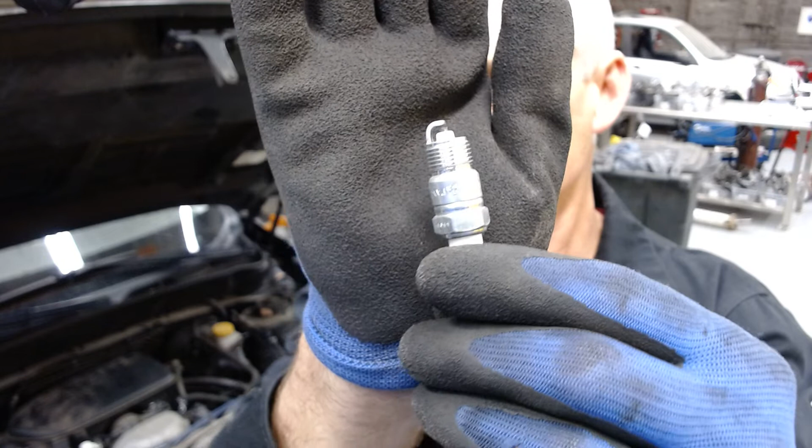The ignition system is that system that creates the spark at the spark plug to ignite the air and fuel mixture that's compressed into a very hot explosive charge by the compression of the piston. So what an ignition system does is takes the spark plug, and causes a spark to jump between this side and that little round center terminal right there in between. I'm going to illustrate this to you this morning very graphically.

It uses this device called an ignition coil. It's a step-up transformer. Transformers on the poles out in the community are step-down transformers. They take the voltage from about 4,000 volts down to 110 for your house. You say, well, how about 220? You get 220 by bringing 110 volt wires to your house and joining them with a breaker on the panel. We call those 110 volt legs.

This is two coils into one. This type of ignition system is called a DIS or waste spark system. It has one coil here and one coil here. Each one fires two cylinders. That's like the car we have here, this '09 Forester.

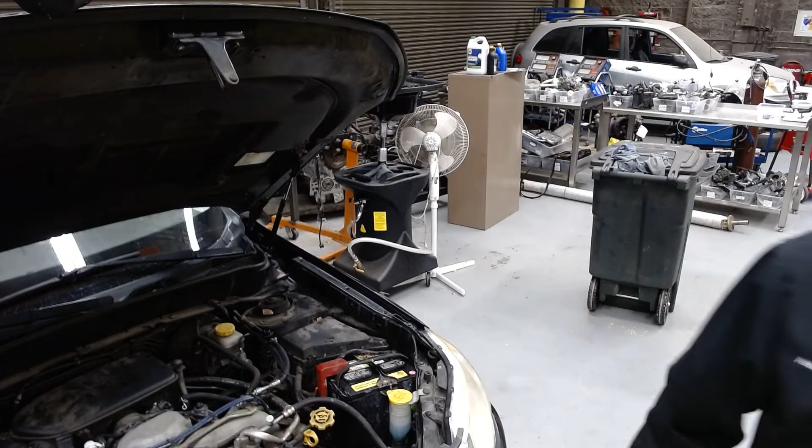So what I'm going to do is pull a spark plug wire and show you the spark. Before I do that, I want to take the camera and come over to the car. You'll notice these two blue cables here and these two blue cables here. This Subaru engine is a horizontally opposed, or pancake, engine. It's got two cylinders going towards the driver's side and two cylinders going towards the passenger side. The pistons are laying horizontal in both directions.

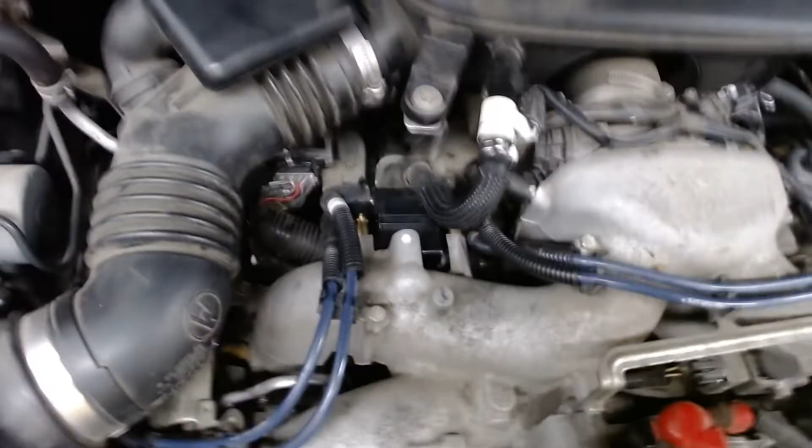So what these four wires are, these are the spark plug wires. And that guy right there, you can see it, is the ignition coil. It's a little hard to see. It's bolted sideways to the top of the intake manifold. These wires carry high voltage, low current electricity to the cylinders to ignite the air and fuel.

So what I want to do is reach down here and unplug one of these wires, which I just did. I just unplugged that wire from number 2 cylinder. I'm going to take my spark plug, set the camera down right here so you can see what I'm doing, and take this spark plug and just push it in and snap it on just like it is.

Then I'm going to take the ground wire. This jumper wire with these two alligator clips, I'm going to connect one to the negative side of the battery. This wire has a very thin insulation, so I don't want to touch it while I'm doing this, otherwise I'll get shocked. This is the one place on a car where you can get shocked, the ignition system, because it's a high voltage, low current system.

I'm going to go ahead and put the camera right here so that hopefully you'll be able to clearly see that spark. I'll put my hand in front of it so it should focus. Okay, having a little trouble getting it to focus. Sorry, a little technical audiovisual difficulties. If I put my hand behind it, you'll be able to see that spark really clear. So I'll start the car now, and I'll try to get my camera to stay put. It's not cooperating real well at the moment.

So let me grab this guy up here, get him ready, and get this guy ready too. And I'm going to go ahead and start the car. Okay, there we go.

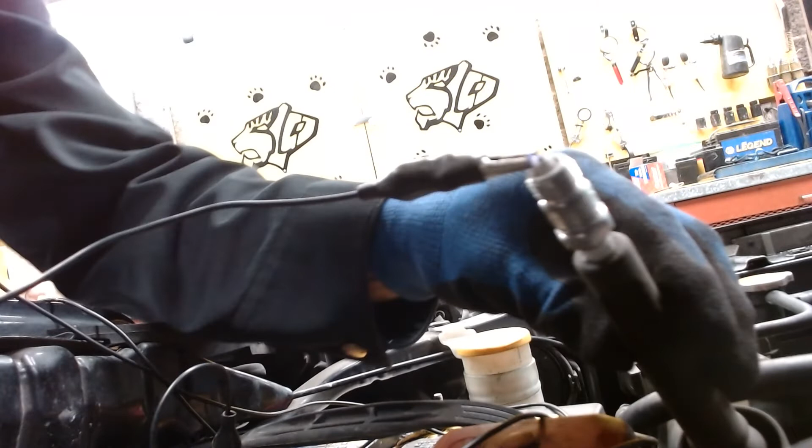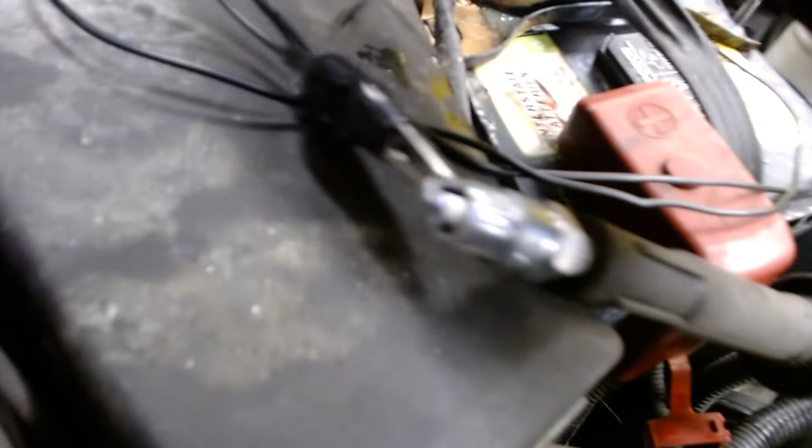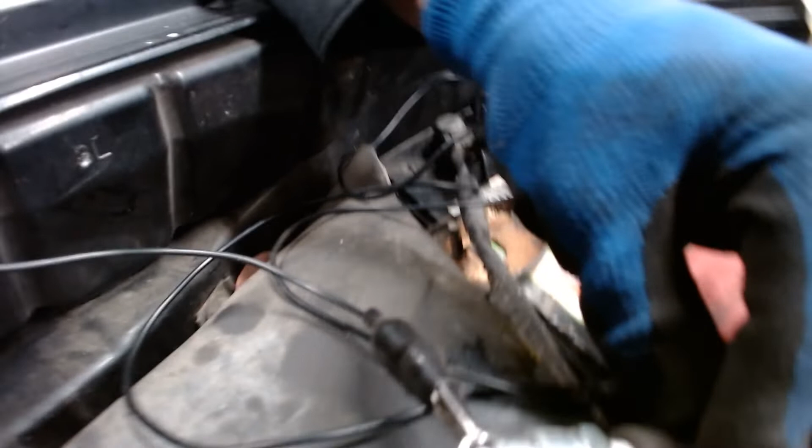Hopefully you can see here. Let me see if I can get it to focus. Come on, dude, focus. I'm struggling to get this thing to focus, but you can see the spark jumping between there. I just can't get it to focus on that, which is a bummer. Let's see if I put it flatter here, you can see that bluish purple spark.

And if I put my hand there, it finally focused. See that spark in there?

Okay, pretty cool. Shut the car off.

I apologize that it was so hard to get that thing to focus on. That spark, that little blue spark you saw, was roughly 10,000 volts, 8 to 12,000 volts. And of course the engine was misfiring because it didn't have that spark plug wire on its cylinder. Anyway, let's continue on in the classroom.

So what we're going to be doing here is talking about the ignition system, its parts and functions, and how it creates that little spark that ignites the air and fuel inside that compressed air-fuel mixture composition in the cylinder. So here we go.

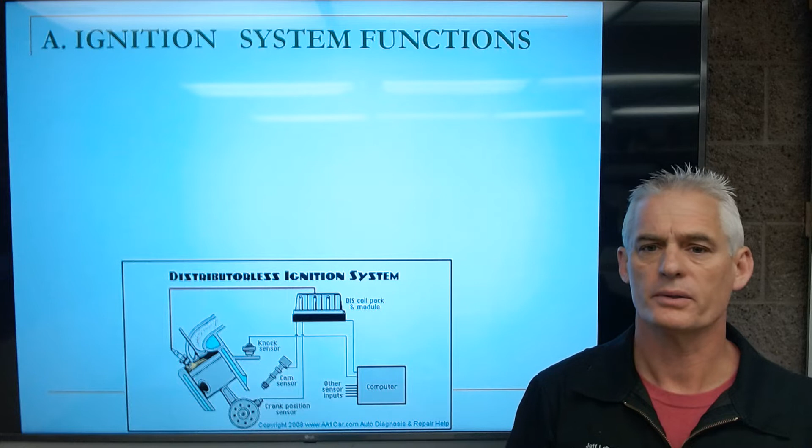So the ignition system's functions go like this. First, its first function is to turn the engine on and off. On a gas engine, we used to just turn the spark off. Now we turn the spark off, depower the computers, and turn the fuel pump off all at the same time. But primarily it was to turn on and off the engine by turning off the ignition system.

Its second function is to produce a high voltage spark at the spark plug to ignite the A/F mixture. A/F mixture is my abbreviation for air-fuel mixture. At sea level, the ideal air-fuel mixture, using a chemistry technical term to describe the ideal chemical composition, is the stoichiometric air-fuel ratio.

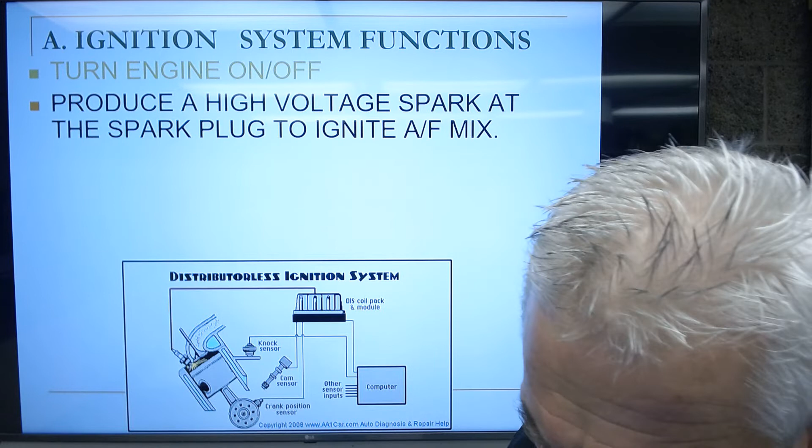That's the chemically correct, or ideal, air-fuel ratio. At sea level, it's 14.7 parts of air to 1 part of fuel by weight, not by volume, but by weight. So a tremendous amount of air is used to burn 1 part of gasoline. If we say 1 gallon of gasoline, a lot of air is used to burn that 1 gallon of fuel. Okay, so we've got to produce a high voltage spark to ignite that air-fuel mixture.

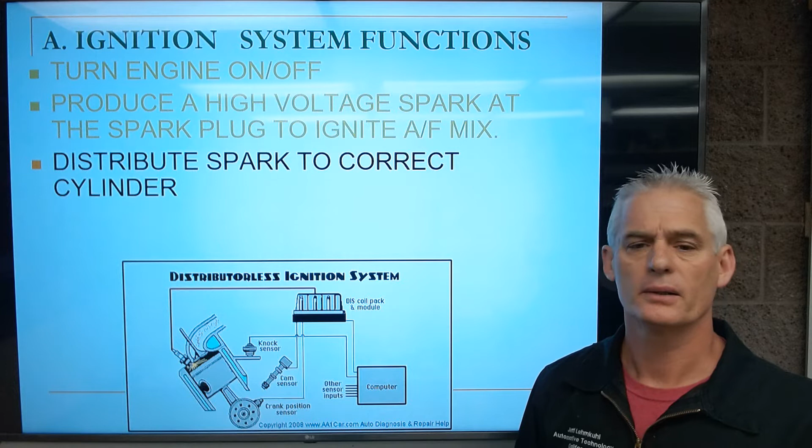Third, we want to distribute the spark to the correct cylinder, and at the correct time. We want the spark to go to the right cylinder, because in the 4-stroke cycle, if my hand is a piston, I go down on intake, up on compression, down on power, and up on exhaust.

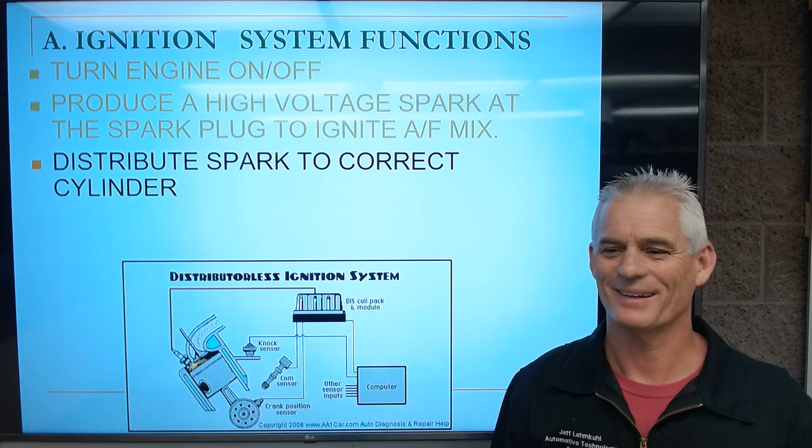Where is it that I want that spark to occur? I don't want it to occur on intake or on compression, but I want it to occur at the end of the compression stroke and the beginning of the power stroke, and I want it to occur in the correct cylinder. In other words, in the cylinder that's at the end of its compression stroke, that's the one that needs to get the spark.

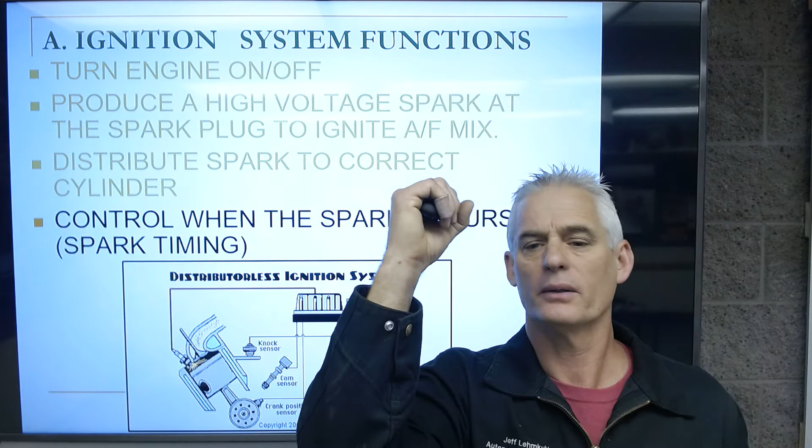And then, timing controls when the spark occurs. So does it occur in this cylinder right at the end of the compression stroke, or in reality, do we start a little bit before the piston's all the way at the top? We say before top dead center, usually 6 to 12 degrees before top dead center at idle, somewhere in there.

And then at freeway speeds, when we're going maybe 3,000 revolutions per minute at roughly 75 miles an hour, the spark may be occurring at, say, 50 degrees before top dead center, because everything's happening so fast, we need to make the spark occur earlier so it has time to ignite the air and fuel, so when the piston is ready to go down on power, the explosion's ready to push the piston down on power.

So what you've got in this picture is a picture of an ignition system. There's a piston connected to the crankshaft, there's a valve, there's a spark plug showing a little explosion, and here is a coil pack, similar to the one I just showed you. This is one type of ignition system. There are 4 or 5 different types, roughly. This one uses a computer and some sensors so the computer can decide when to make that spark occur into the spark plug to ignite the air and fuel.

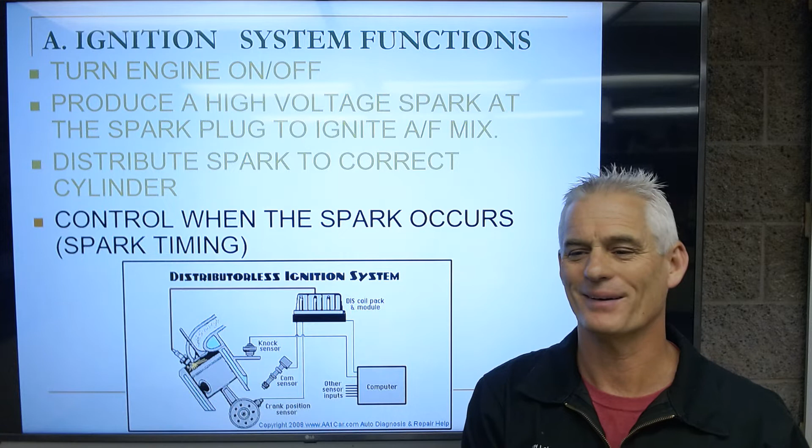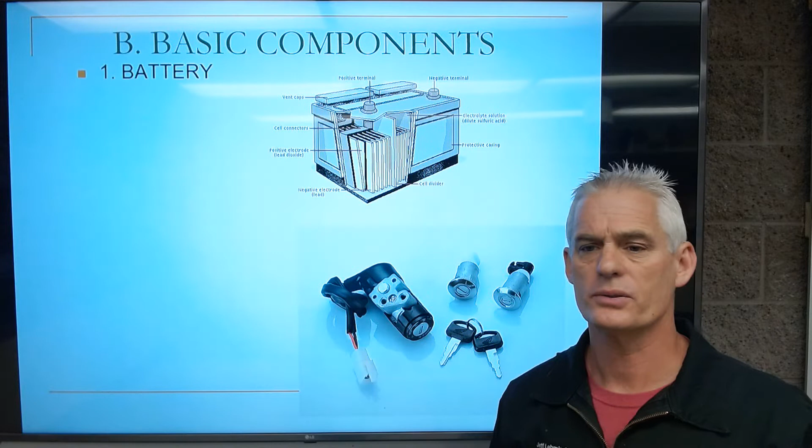So here we go. Next, the components of an ignition system go like this. The first is the battery. The battery is involved in initially sending power into that ignition coil to make a spark, so just like the starting system and charging system, the battery is initiating everything. Once the car starts, the battery isn't powering things up anymore, as you learned in the charging system, but it's the alternator. So here's a picture, a cutaway of a battery.

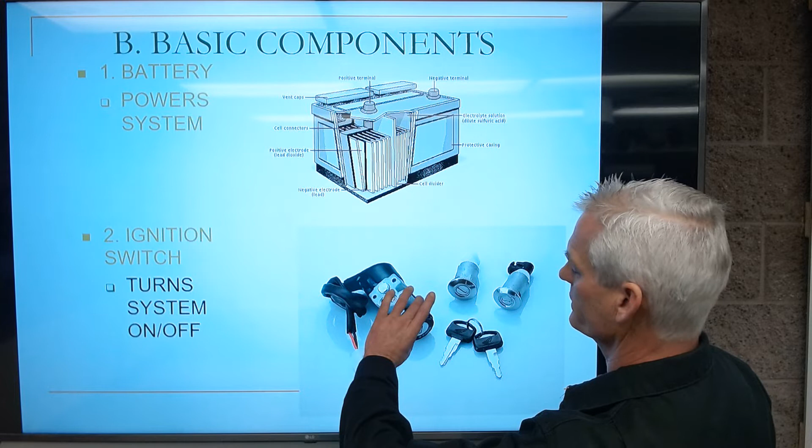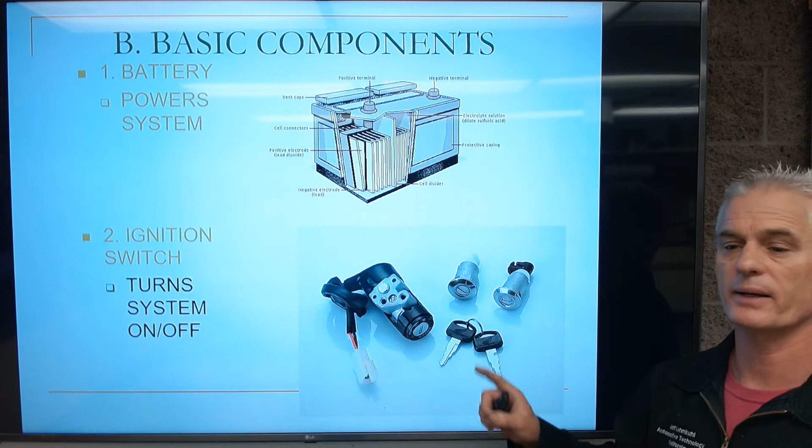Second component is the ignition switch that's used to turn the system on and off. Here's a set of keys and a couple of lock cylinders. This is an ignition lock cylinder, and these are door lock cylinders. Most all keys today have a chip inside them that talks to a little transceiver around the cylinder, saying, I don't want you to crank this car and start it unless I've got the right key. So that's a theft deterrent and prevents cars from being stolen so easily.

The ignition switch is used to turn on and off the system. Whether it's a push button or a key type, it's still turning the ignition system on and off, amongst other things. Third is the ignition coil, and here's where you need to spend a little bit of time.

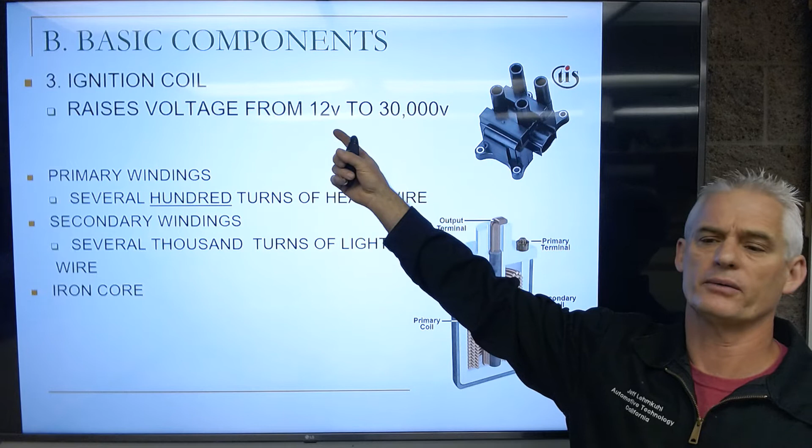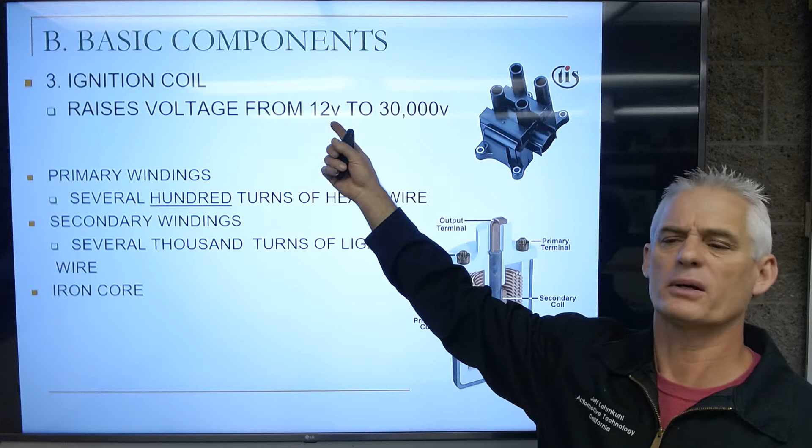The ignition coil is a device that steps up the voltage, so it is a step-up transformer. It's making voltage go from roughly 12 volts, 12.6 of a fully charged resting battery. During cranking, the battery voltage drops to about 10 to 11.5 volts because we're pushing current through the starter motor. Once it starts and the alternator starts running, this is going to be closer to 14, maybe 14.2, 14.3 volts, depending on the car.

The ignition coil is going to boost that roughly 14 volts when we're running up to roughly 30,000 volts. At idle, most cars idle about 10,000 volts, but when they're going down the road, they can be at 20, 30, 40, 50,000 volts. I've seen Ford systems that'll make 100,000 volts.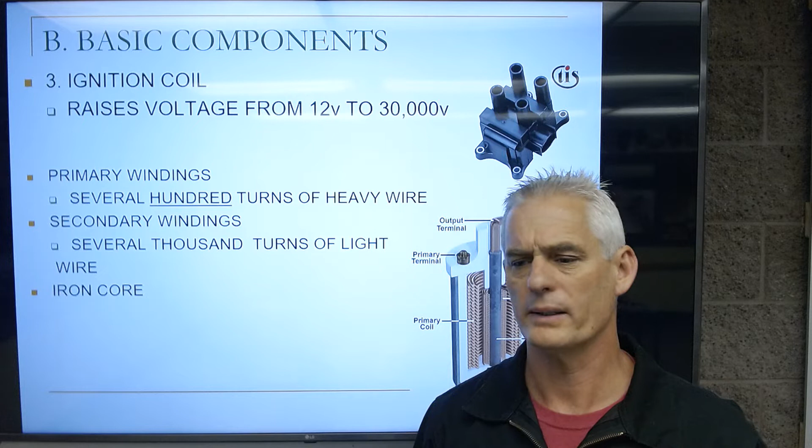Very, very high voltage, but it can't hurt you. It does shock you—it's like a very strong static shock, but it doesn't electrocute you. I define, and this is my own definition, electrocution as current flowing through you where you can't let go and you're constantly being shocked, whereas this will just give you a zap and that's it. Can it hurt you? Can it kill you? No, not possible—it's way too low of current. It has high voltage, but it's just like a very strong static shock.

If you guys were here, as I usually do, I take the whole class—we all hold hands, one person touches the spark, the other touches the battery ground or the engine block, and we all get shocked at the same time. It's really cool, you'll like it.

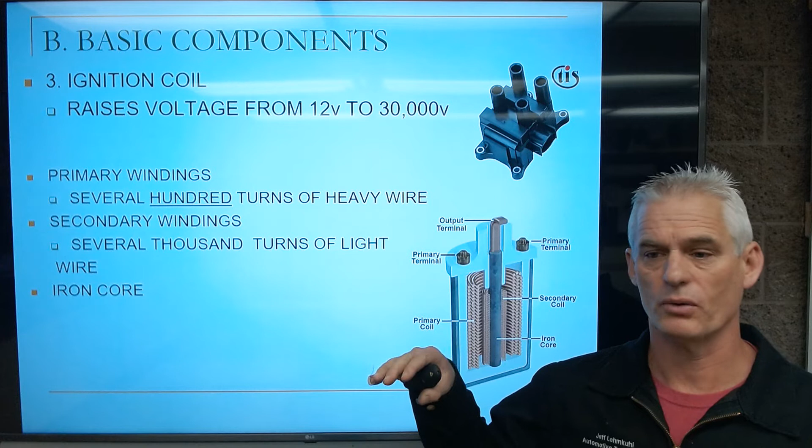So let's talk about how a coil is constructed. It's a step-up transformer, boosting voltage from very low to very high. The transformers on your poles are stepping the voltage down for your house—we take roughly 4,000 volts going down the street for PG&E and bump it down to 110 volts.

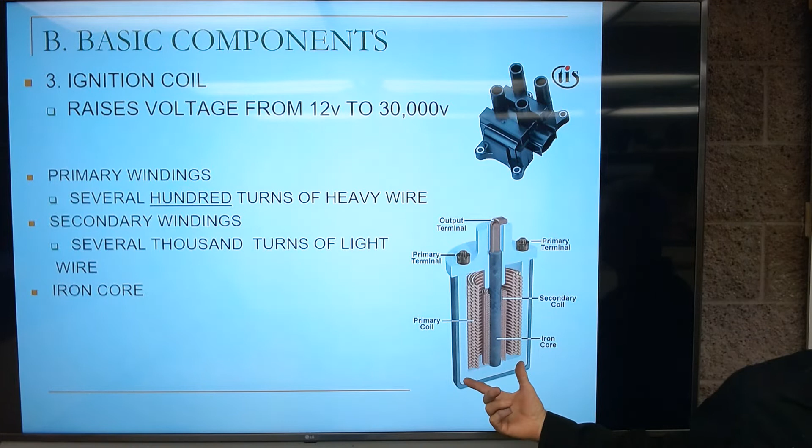So ignition coils—here's one style, this is a DIS coil. This is an old school can coil, and I've got one of those here too. Here's the difference between these: here's an old school can coil, and it looks an awful lot like the transformer up on a telephone pole.

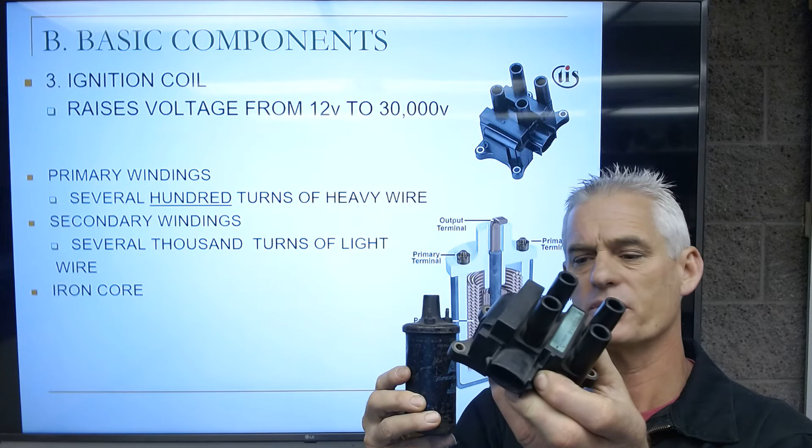Here's a DIS coil, which is actually two coils in one. And then here's a modern car—this is a Honda coil-on-plug coil, an individual coil that snaps right onto one spark plug. So it goes just like this—you take this coil and push it onto the spark plug, and that's how it sits in the engine.

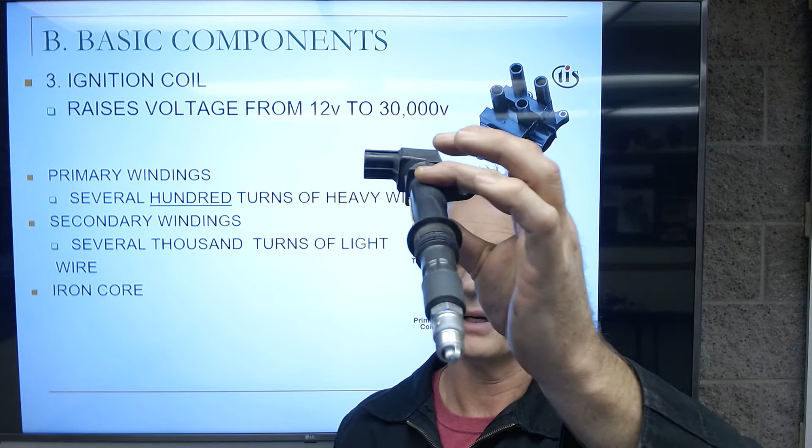This one has no spark plug wire, like the long blue cables you saw out there on the Forester. It does have some 16 gauge wires plugging in here that turn it on and off, but this guy is boosting the voltage from roughly 14 volts to anywhere from 10,000 to 30,000 volts.

So what I want to show you is what's inside this coil. We'll look at a can coil because it's easier to take apart. These are constructed with two coils of wire inside, with some segmented iron bars down the center, and it's all inside a non-conductive oil—kind of interesting, very close to what you have on the telephone pole. That non-conductive oil cools it, and these would very rarely fail back in the day.

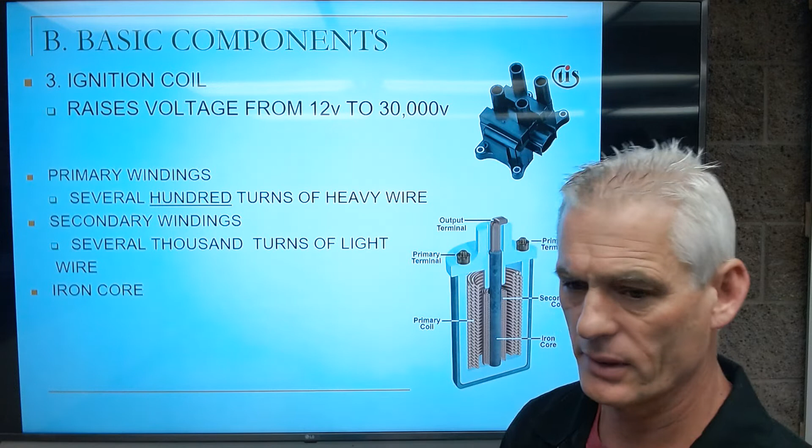When I was in high school—I graduated in 1981—pretty much every coil was like this. In the mid-'80s they started changing, and then changed significantly going into the '90s. But it shows here a primary coil, primary windings, and secondary windings or secondary coil. So inside you have two wrappings of wire.

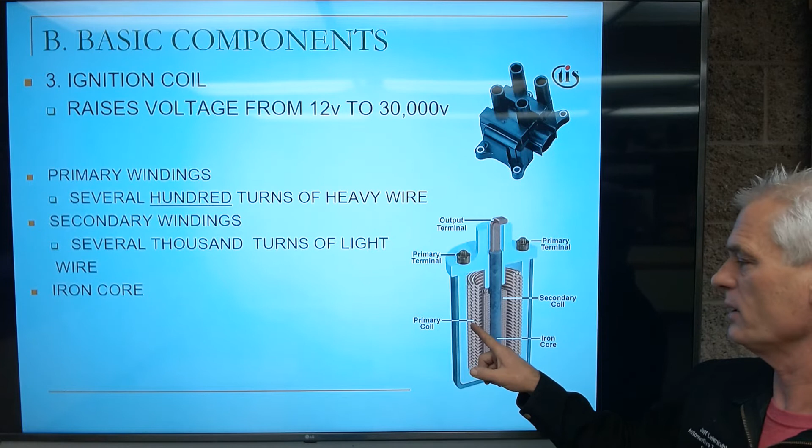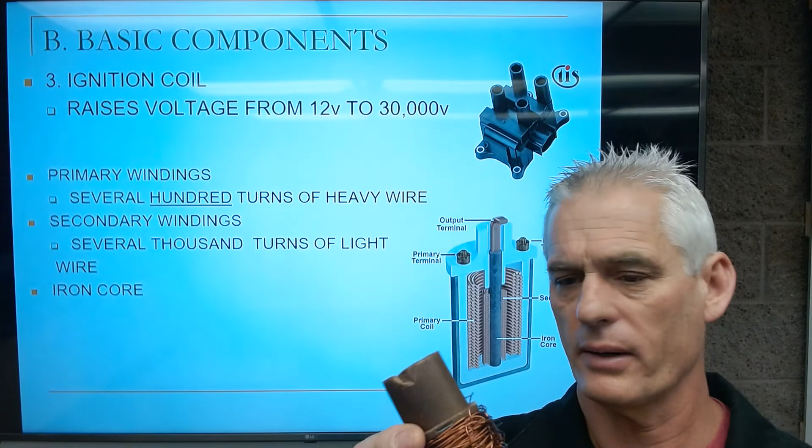The primary windings are several hundred turns of heavy wire—roughly 16 to 18 gauge. The secondary is thousands of turns of very, very fine wire. Here's the wire: here's a can coil with the primary wire, probably 18 gauge, copper, solid, and coated with plastic so these wires don't short between each other.

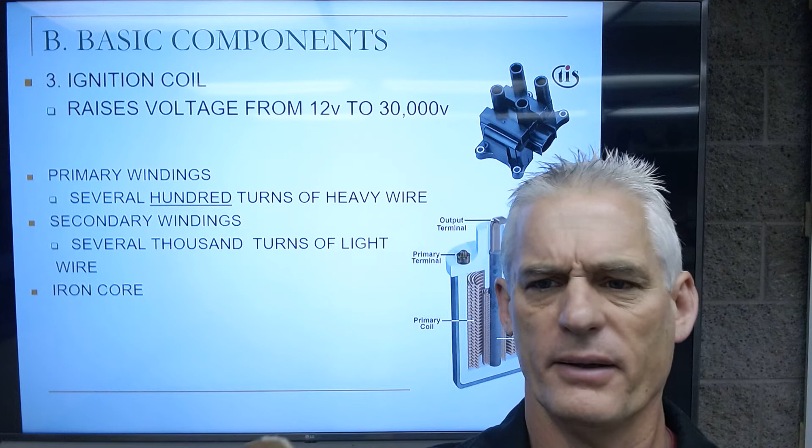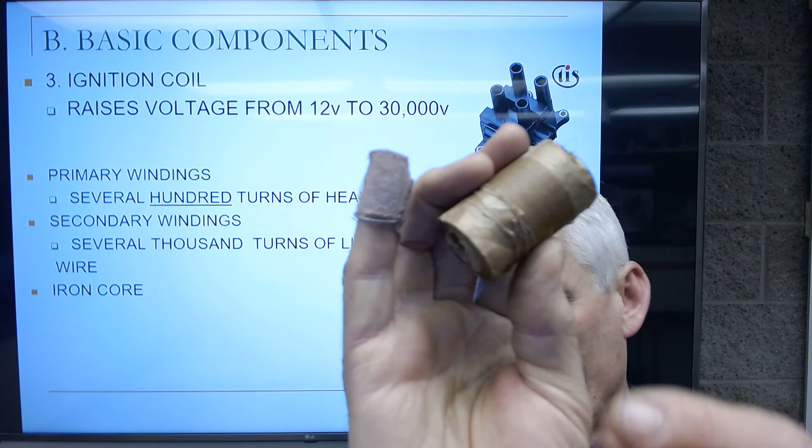And then here's the secondary, which is really hard to see. You can see the wrappings of copper there, but if I grab the end of it—let me do that—it's going to be very hard for you to see. I'm going to put it in front of my hand to see if the camera will focus on the wire, and it's hanging right here.

I've got it in my... okay, there it is. You can just barely see it. Now it's focusing on it. Little tiny fine hair-like wire, and it is like hair.

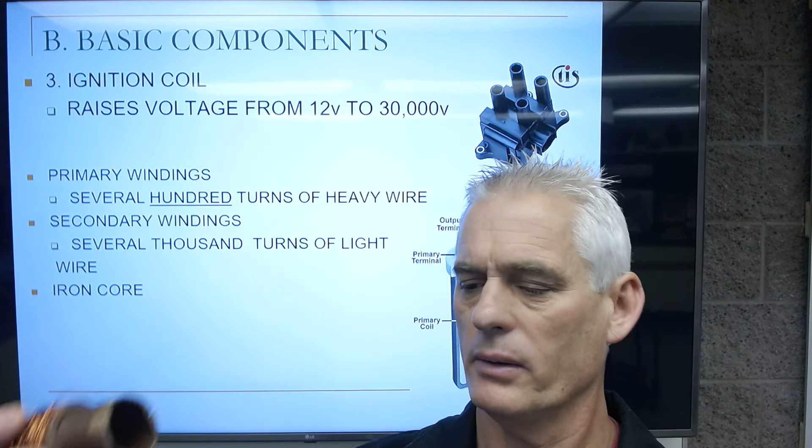It's roughly 1/1000th to 2/1000ths of an inch thick, and it's all wrapped around these layers of paper. Inside the ignition coil, here's the primary, here's the secondary. This just slides inside. The magnetism that's created goes right through this paper wrapping, which has no effect on it at all.

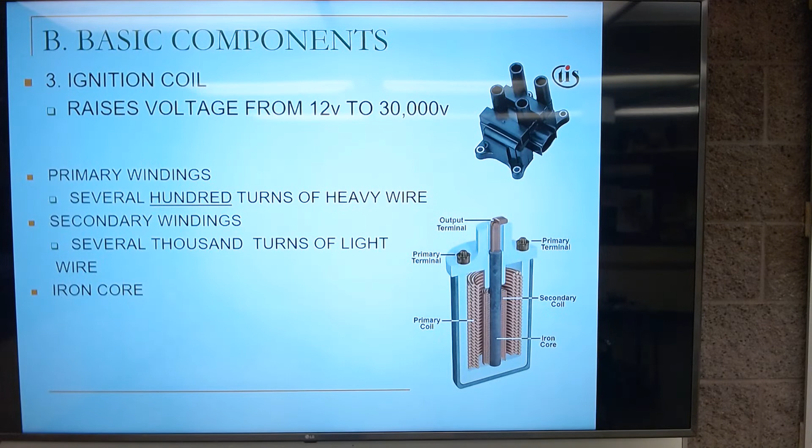Down the center of that coil are these segmented iron bars right here. So these would be... here's another one. This one's kind of pretty. There's another wrapping of secondary wire, and you can see the wire pretty clearly there. These segmented iron bars go down the center to strengthen the magnetism that's made.

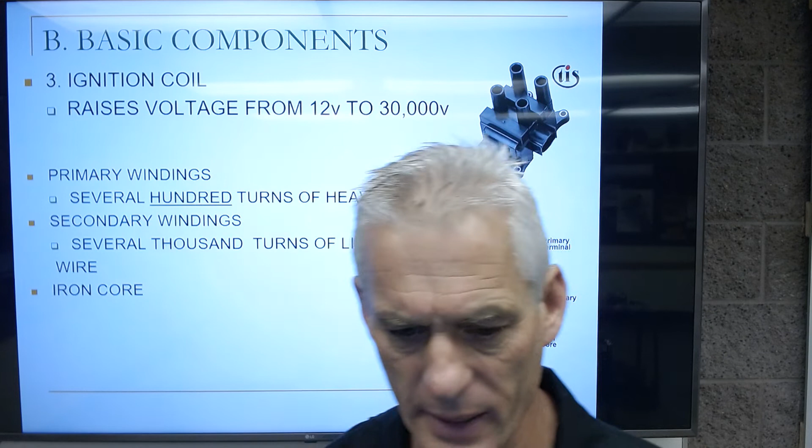That's the iron core I'm talking about, those segmented iron bars. Let's talk about how this thing works, okay? Well, we'll get to it in just a moment, sorry. That's an ignition coil. So the ignition coil has a primary winding or coil, a secondary winding or coil, these segmented iron bars, and it's a step-up transformer. So next is spark plugs.

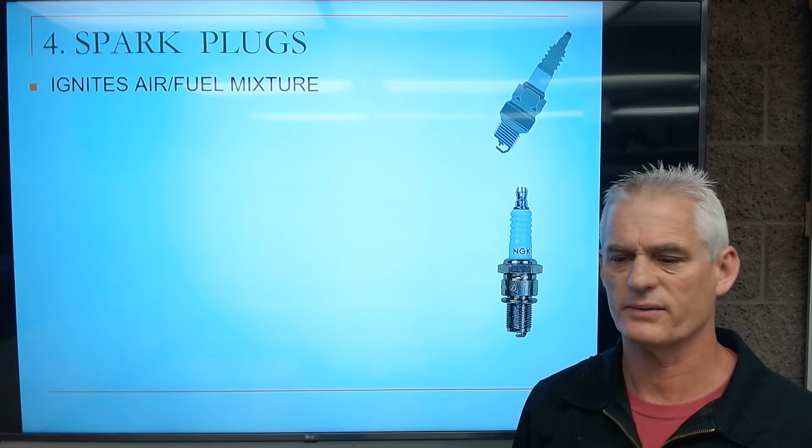The spark plugs are going to ignite the air-fuel mixture. Okay, and here's another one there. So a spark plug is going to ignite the air-fuel mixture. It just gives us a little center terminal and side terminal between which a spark can jump and ignite the air and fuel that's all compressed around it.

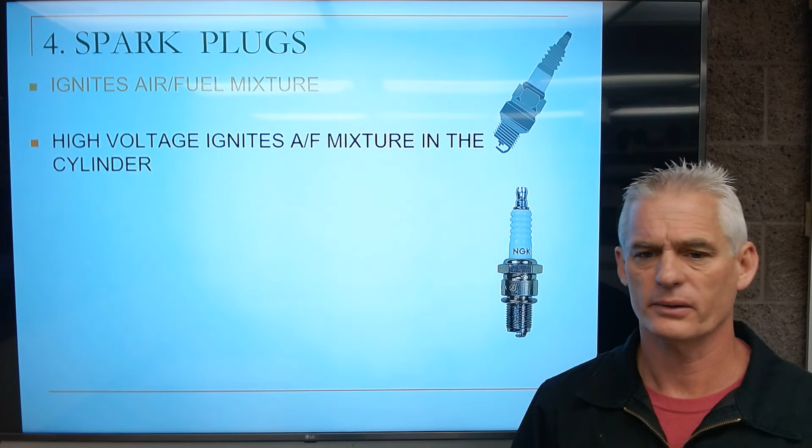High voltage ignites the air-fuel mixture in the cylinder. The center and side electrodes, center there, side here, provide a connection for the spark to jump. So the spark plug has a connection for the plug wire to snap on. It conducts spark to the cylinders.

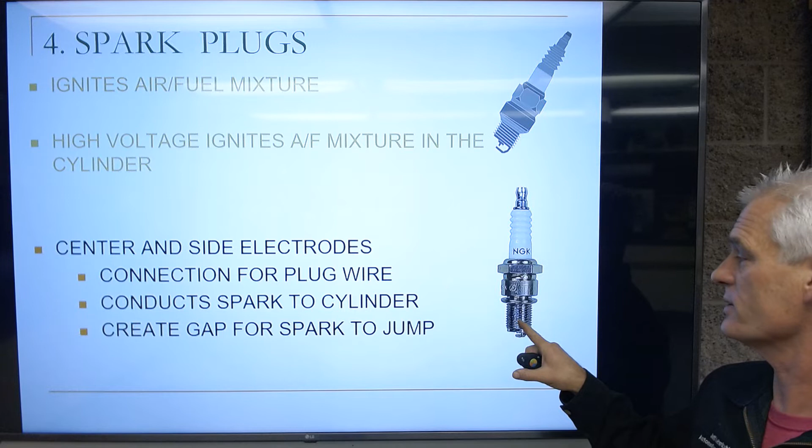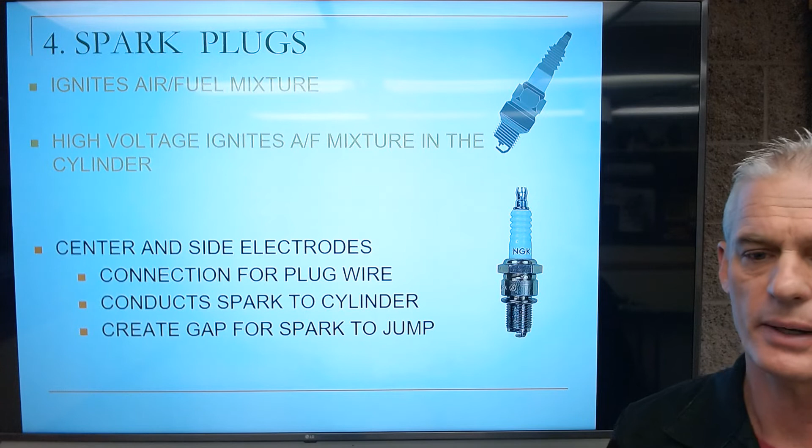It goes down through, and then it jumps between the gap there. Some spark plugs jump from the center terminal to the side, some jump from the side to the center, but that's another class. These thread into the cylinder head with this hex here, and we can get it off with a wrench. It's got a porcelain insulator, and high voltage electricity goes down through the center of this and jumps to ground. Okay, that's the spark plug.

So next, on some cars, we have what's called a distributor. Old school cars up until the mid 90s, and if it's a Honda, all the way until 2000 roughly, had what was called a distributor, a fairly large rotating mechanical device. I'm grabbing one right now, like this. You can kind of get an idea of the size. This is from an old Chevy 350, would have been out of like my old Nova or something like that.

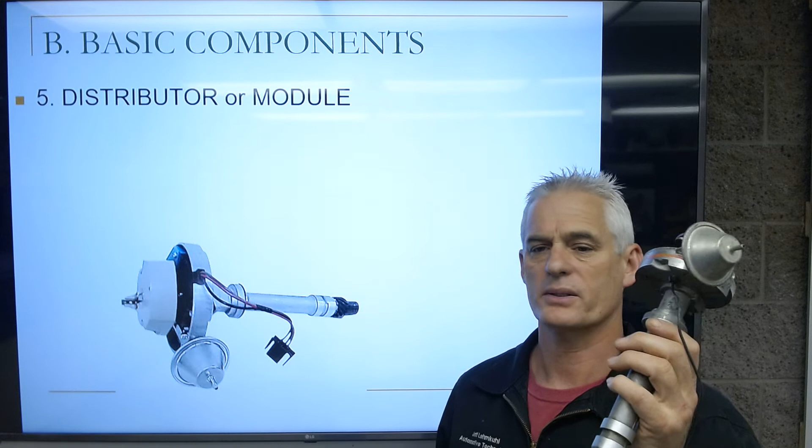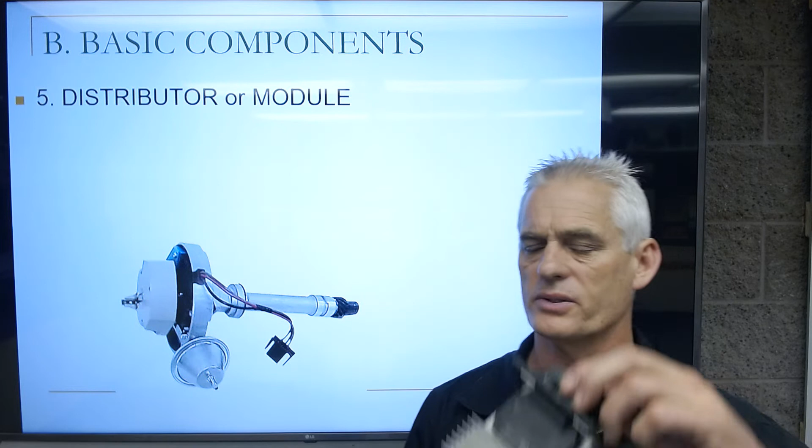Gear driven off the camshaft, it spins that guy in there, and this guy's whole job was to distribute the spark to the correct cylinder at the correct time. Modern cars don't use a distributor anymore, but they use some sort of an ignition module. An ignition module is a solid state, no moving part device that's used in conjunction with ignition coils or coil-on-plugs to fire the plugs at the correct time.

Some people who know a lot about ignition systems would say, really, you want to compare a distributor to a module? Well, early electronic ignition, computer controlled distributors had modules inside them, so they were kind of incorporated into it. But anyways, both are involved in turning on and off that ignition coil to make the spark. That's how basic we're going to keep it at this point.

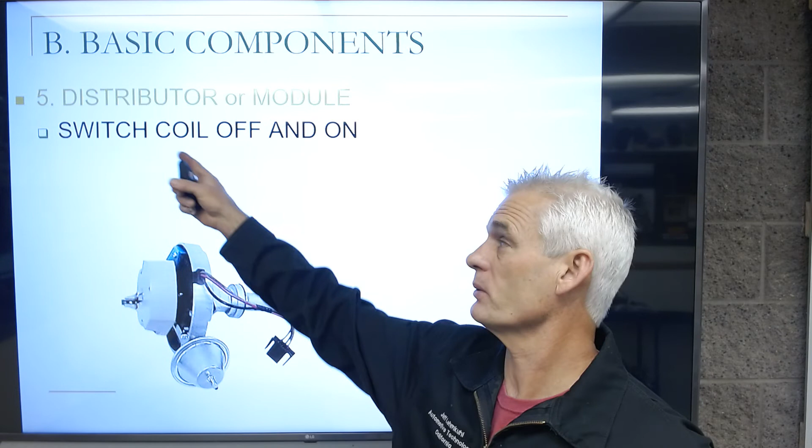So they're going to switch the distributor or the module. Both are used to switch the coil on and off, or off and on, either way you want to look at it, and then send the spark to the correct cylinder at the correct time. That's obviously very important because we want the thing to run right, and that's got to occur at the end of the compression stroke, right before the power stroke. So whichever cylinder is at the end of its compression stroke needs to get a spark.

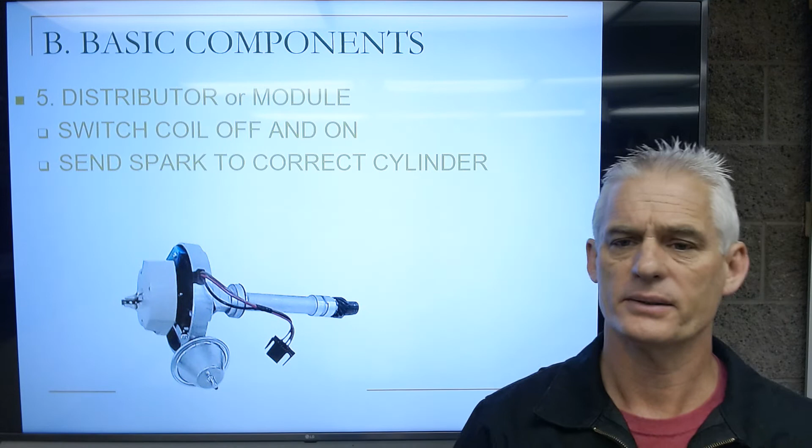Okay, so that's that. Next we have wires in the ignition system. First we have what's called primary ignition system wires. These are low voltage wires, anywhere from 9 volts to 200 volts, and they are 16 gauge wires.

Really, it should be more like 10 volts to 200 volts, because during cranking there's only about 10 volts going through them. Once the engine's running, there may be as much as 200 volts depending, but that's a bit confusing, so we'll just say it's roughly 14 volts. In any case, the secondary voltage is 10 kV to 50 kV.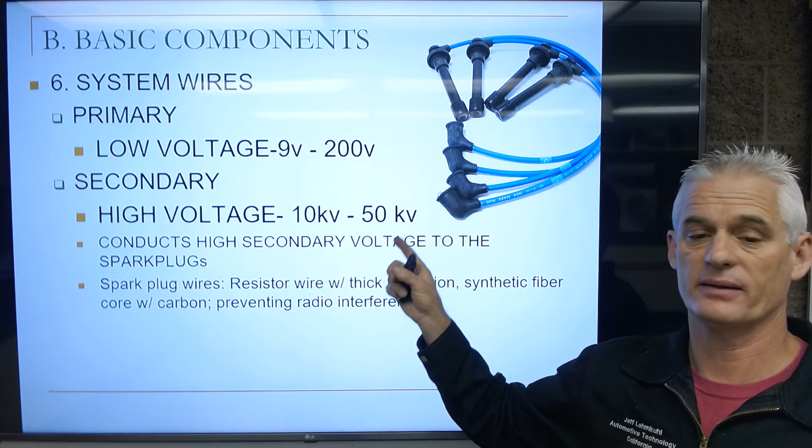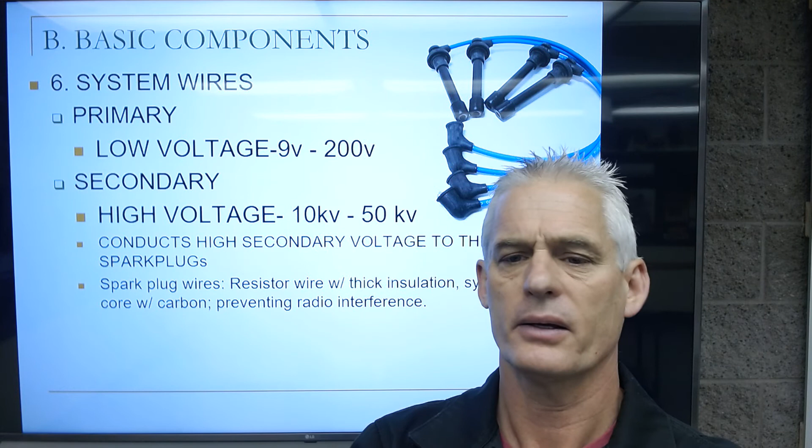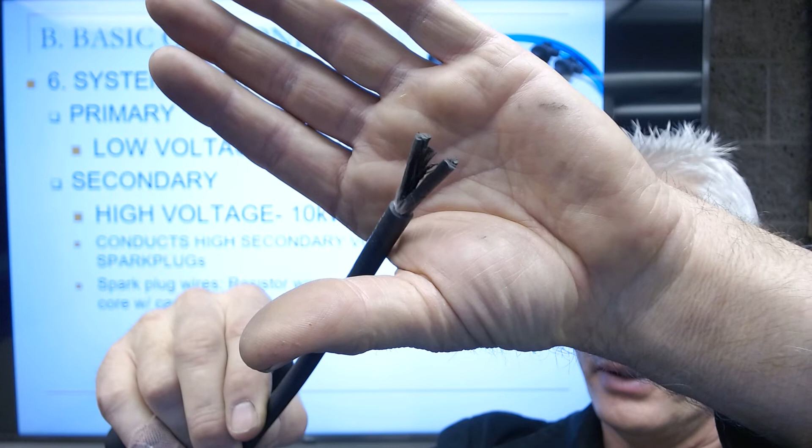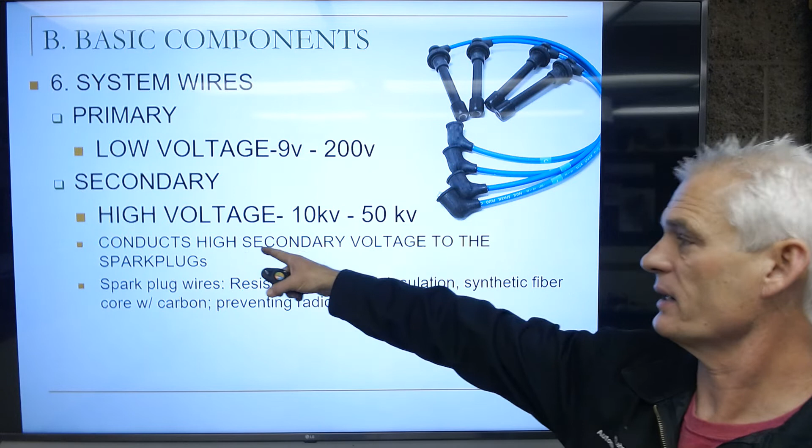These are very thick insulated wires, we call those spark plug wires. I'm grabbing one down here to show you. Here's a spark plug wire, and it's got a very thick coating. I've cut this guy open, and it's got this carbon impregnated, fiberglass-looking core, and the electricity will conduct down that. Then it's got this very thick insulation to keep the spark from jumping from the center of that wire to ground on some metal part. So the secondary is going to conduct high secondary voltage to the spark plug.

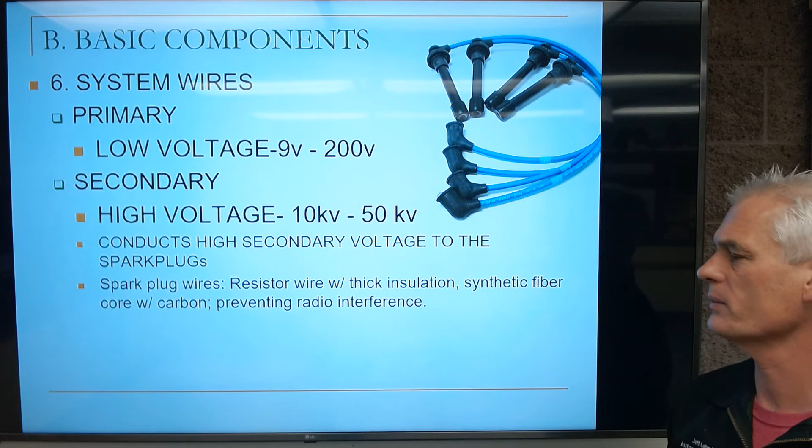Let's go back to the primary for a moment. The battery and alternator bring low voltage in through 16 gauge wires. The secondary side conducts high secondary voltage to the spark plugs. Spark plug wires are what we call resistor wire. They have thick insulation and are resistor wire, so believe it or not, we don't get a lot of magnetic field interruption of your radio reception. They have a synthetic fiber core with carbon, preventing radio interference.

Okay, here's how an ignition coil operates. The ignition coil operates by putting current through a coil, producing a magnetic field.

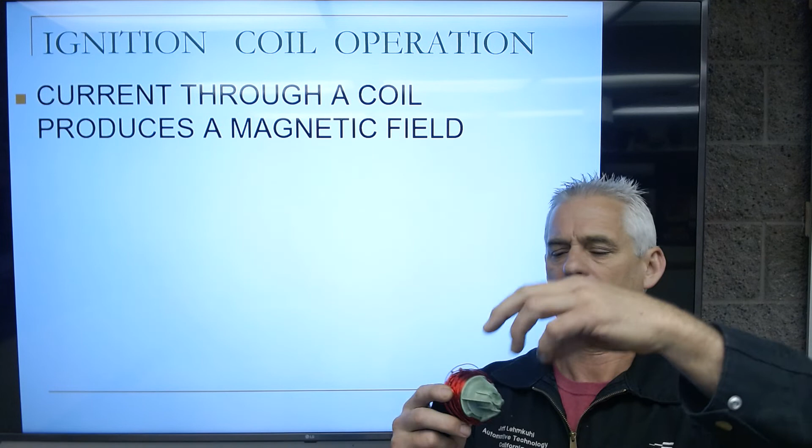Anytime I take electricity from the battery or from an alternator and put it through this coil wire, this insulated 16 gauge solid copper wire, I make a magnetic field. If I put current through a wire, I make magnetism. If I wrap it into a coil, I make much stronger magnetism. It becomes an electromagnet. If I put segmented iron bars down the center, I strengthen the magnetism. So what we do is put current through and make a very strong electromagnetic field.

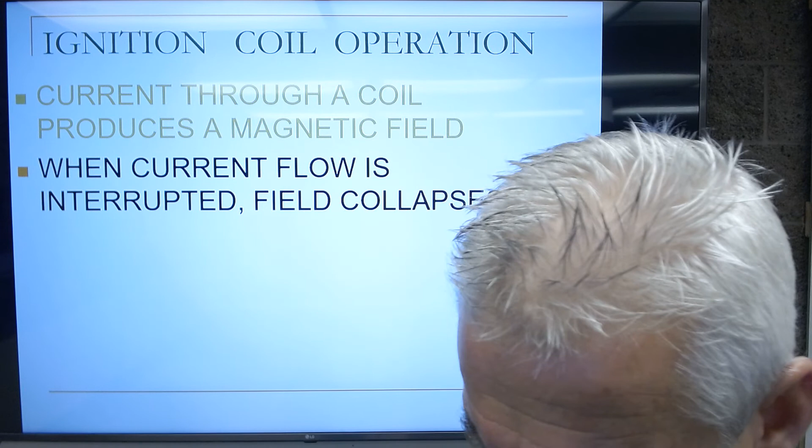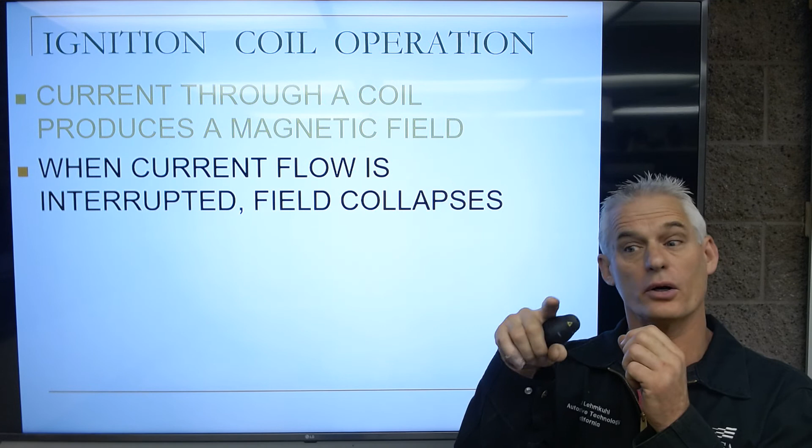If I turn the current flow off through this coil, if I just shut it off, we say that the magnetic field collapses. Now you say, what do you mean by collapses? I don't just use the word turns off or shuts off, because that's not what happens. As the current flow shuts off, the magnetism will dissipate out and affect things around it. So we say it induces, that is, puts into something else, a high voltage surge in the secondary windings.

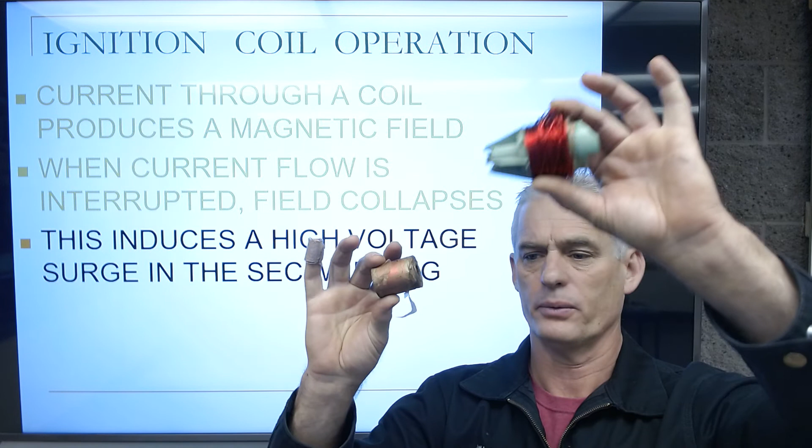Let me explain, that's my fancy English. If I've got current flowing through this coil, it makes a very strong magnetic field surrounding both the primary and the secondary, which is down the center here. When I shut this current flow off, the magnetic field collapses and causes a very high voltage surge in this secondary.

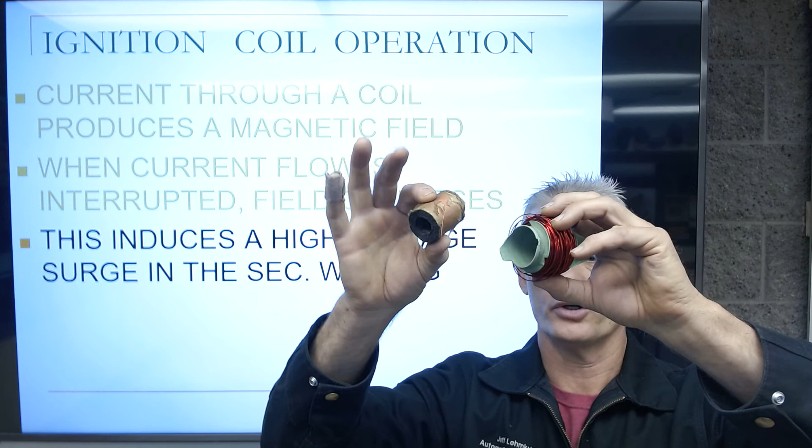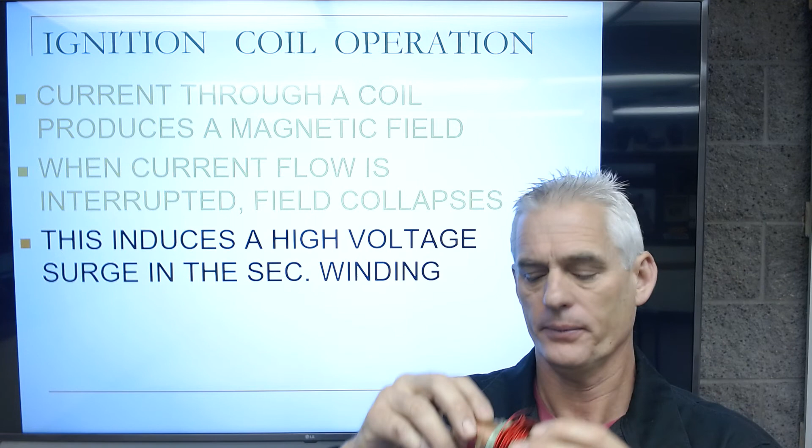You say, well, why does it step the voltage up? Why does it go to high voltage? It has to do with the number of turns of wire. If this had less turns than this, I would step the voltage down. Because this has way more turns of wire than this, the voltage bumps up quite high. It's a really simple magnetic principle that happens in nature that I can use to boost voltage to get enough voltage to jump a gap on a spark plug.

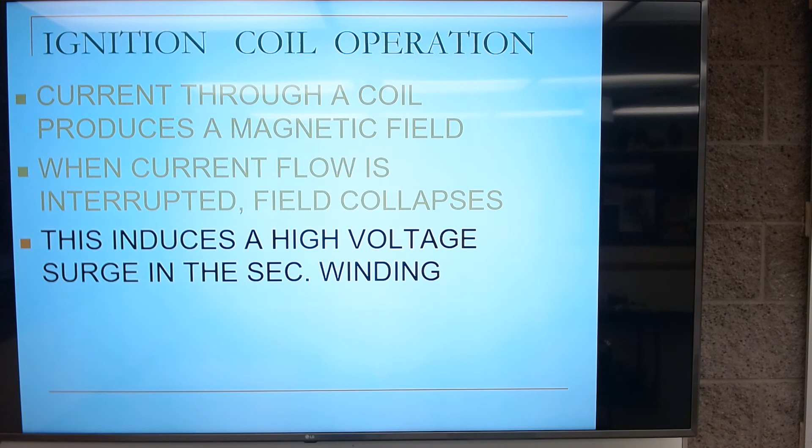The voltage of the battery and the alternator are nowhere near high enough to jump a spark plug gap, which is usually around 40 to 60 thousandths of an inch. If I look at this spark plug here with my hand behind it, that gap is about 40 or 45 thousandths between that side electrode and that center electrode. Some go as large as 60 thousandths, but we need a high voltage surge to get across that.

So the ignition coil, being a very simple device with those two wrappings of wire, can boost the voltage and create a spark to ignite the air and fuel. And that may be all we have.

All right, so that's a little basic introduction to the ignition system. We'll be showing you some things about changing spark plugs and gapping spark plugs and a few other things like that in some ensuing hands-on demonstrations. That's it for now. All right.